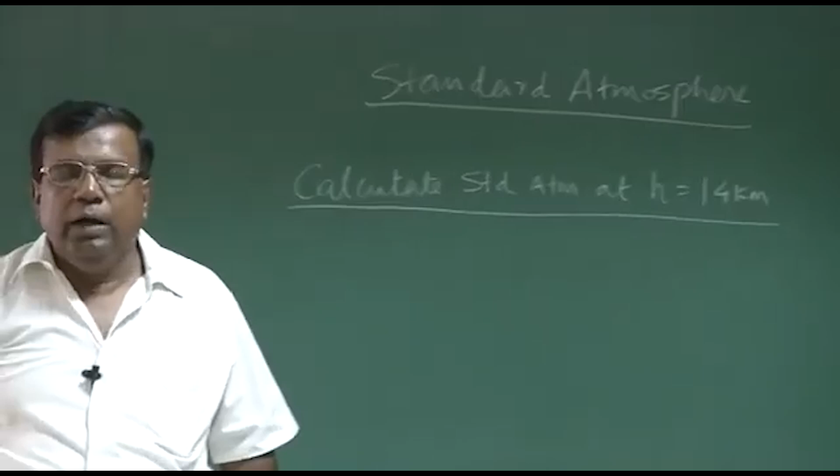I'll be solving one practical problem. Let us say I want to calculate standard atmosphere at h equal to 14 kilometers. This is my question. And what do I mean by standard atmosphere? I am asking, do I know pressure, density and temperature?

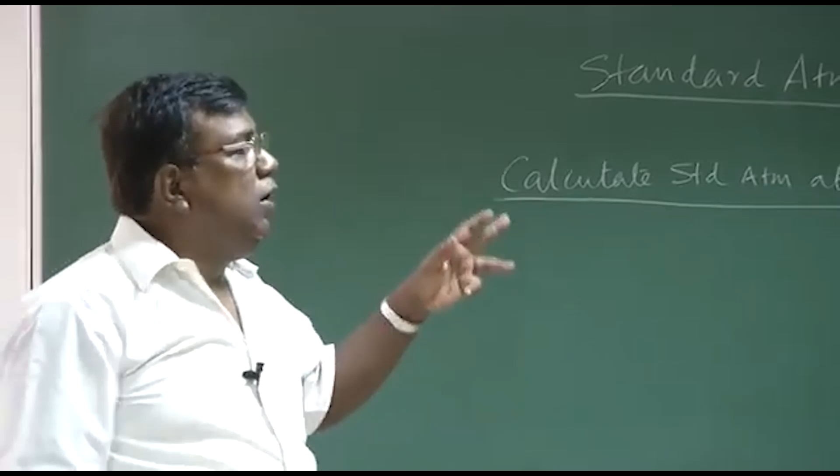At the same time, I know that temperature data versus altitude has been generated experimentally by firing sounding rockets and launching weather balloons at different places, and some average values have been taken. These average values were used to represent the variation of temperature with altitude, which we have already seen. Please understand, this is experimentally generated. This is the starting point.

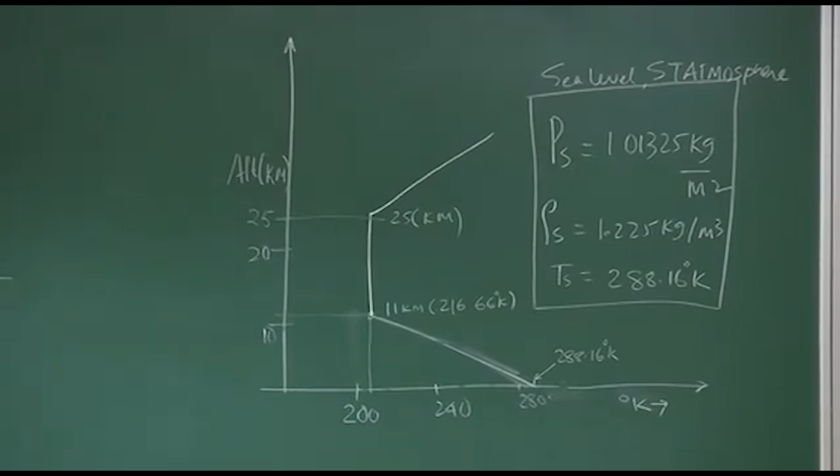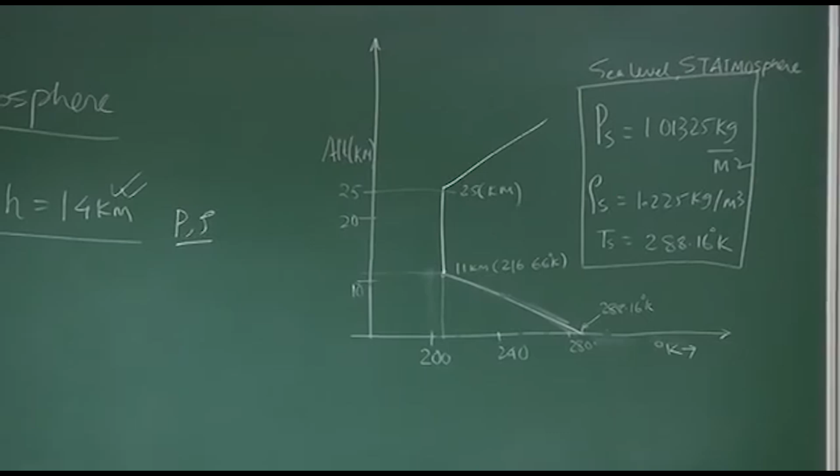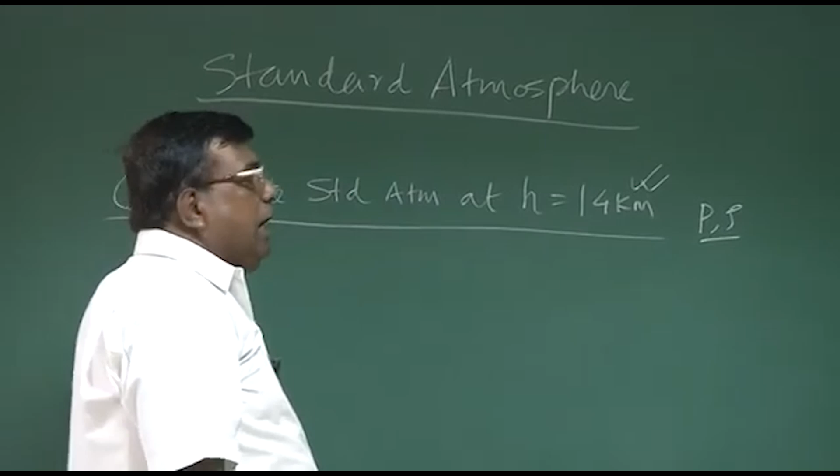Now what is our question? At h equal to 14 kilometer, what are our pressure and density? Temperature we already know from this variation, which is agreed by every team and organization working in aerospace. So when I evaluate at h equal to 14 kilometer, I should immediately see the temperature variation. That is the starting point.

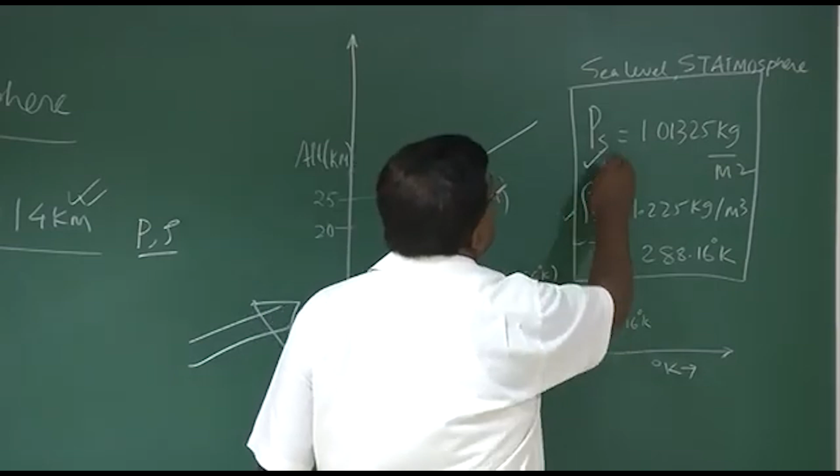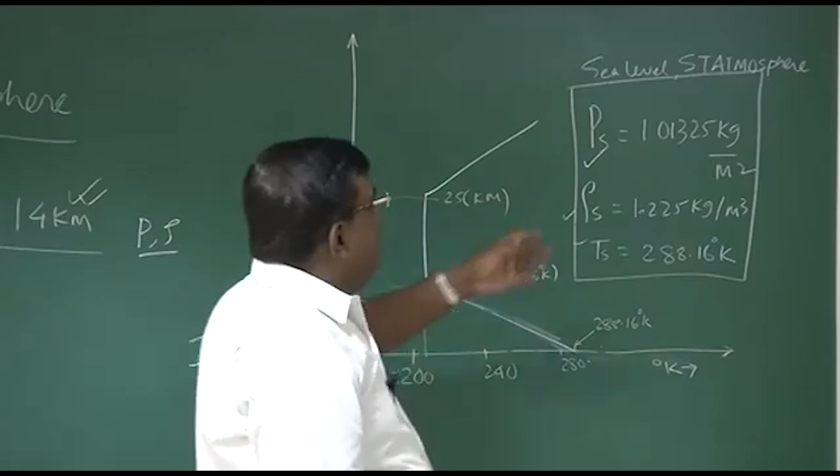At sea level, in standard atmosphere condition, these are the values: pressure is 1.01325 kg per meter square, density is 1.225 kg per meter cube, and temperature is 288.16 degree K. And of course, this standard pressure we mean static pressure. Whenever we say pressure without mentioning anything associated with it, we are actually meaning static pressure.

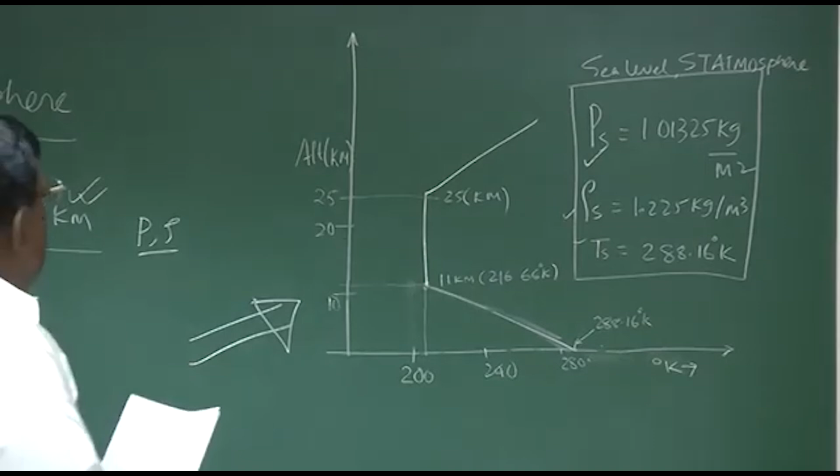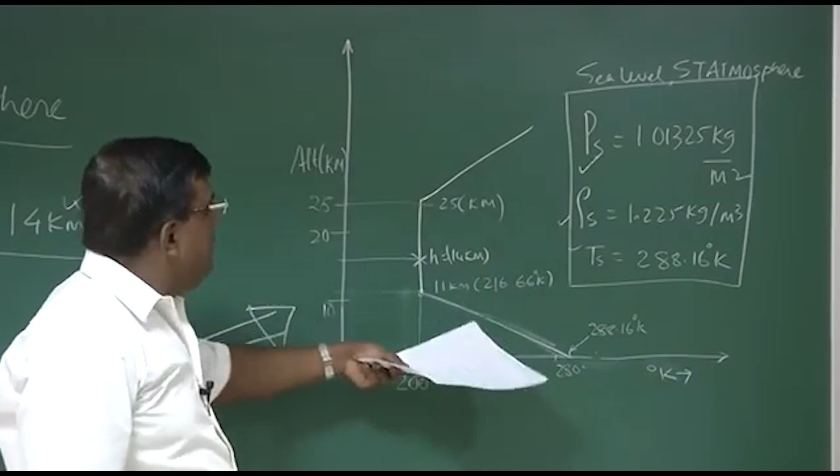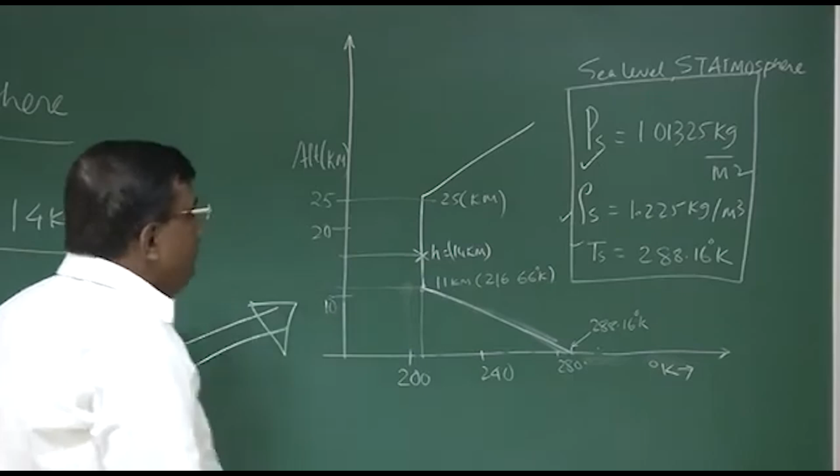So if I want to find the properties at 14 kilometer, let's say this is the point where h equals 14 kilometer. It's very simple. From here I have to start and find what the property is here. I know from here to here there is something called gradient region, and then there is an isotherm. So there are two regions, and we know how to calculate the properties using P equal to rho RT, assuming air to be a perfect gas.

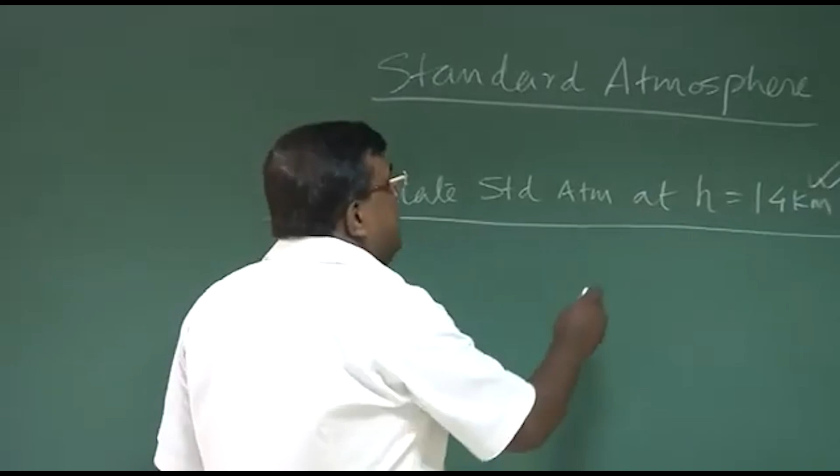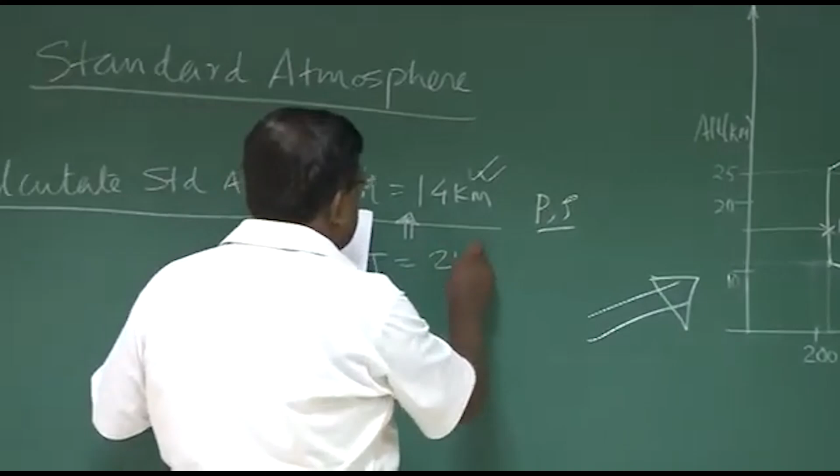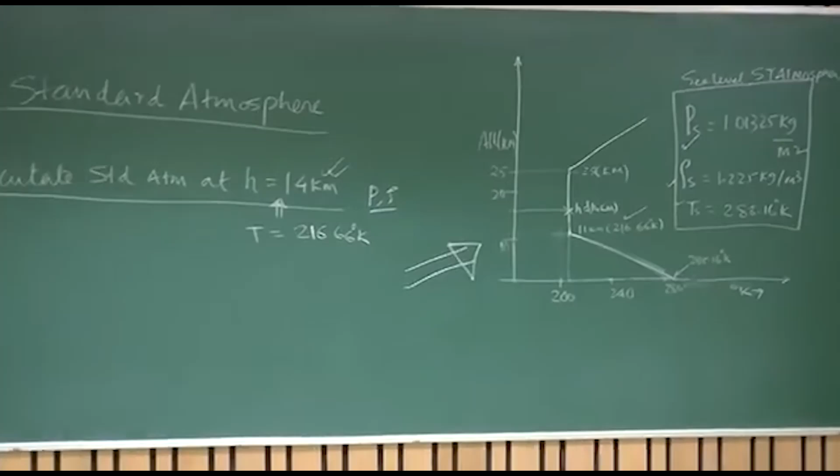Since it is h equal to 14 kilometer, I immediately see here and find that at 14 kilometer the temperature is 216.66 degree Kelvin, which I have written here. This I am directly getting from this chart. In practice, you will find there is a standard atmosphere table generated. You can do a Google search and find it, and I am trying to show you how that table was generated. As a specific case, I have taken h equal to 14 kilometer. What are the values of pressure, density, and temperature, we will find out.

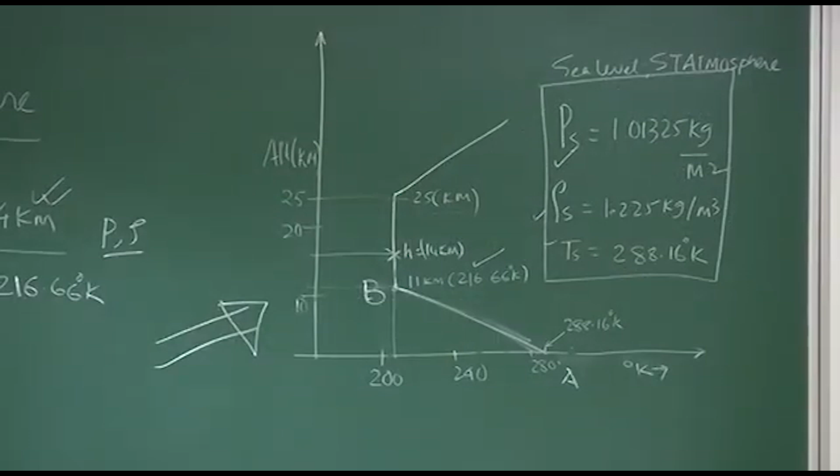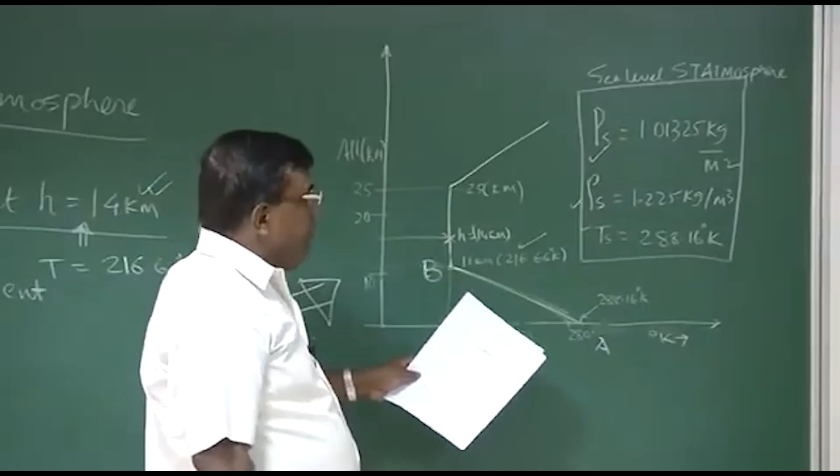So first, what I do is mark it point B, and let me call this point A. I will first see up to 11 kilometers, this point A to B, because there is a gradient part, since the temperature has a lapse rate. And then from 11 to 14 kilometers, it is isotherm, that is, temperature is constant.

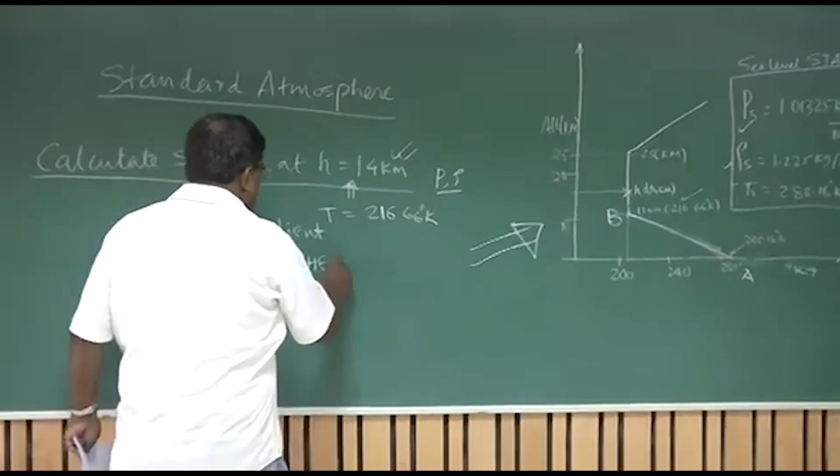We have already developed relationships for the gradient region as well as for the isotherm. We have to simply apply that. Let us do that. If you see in the gradient region,

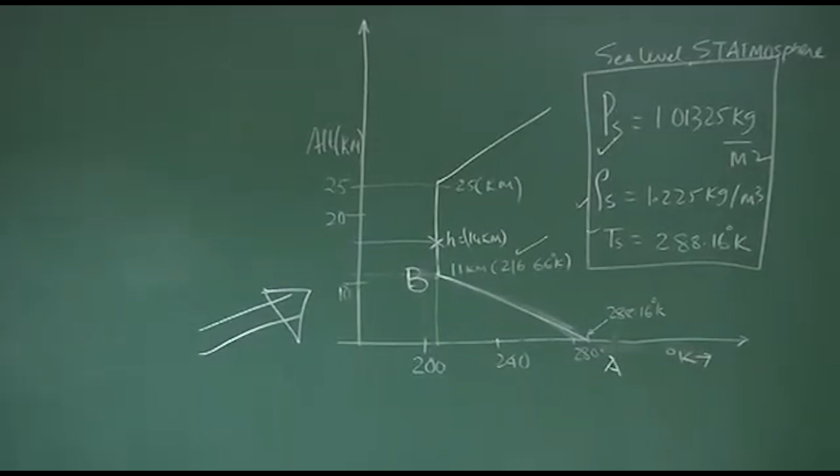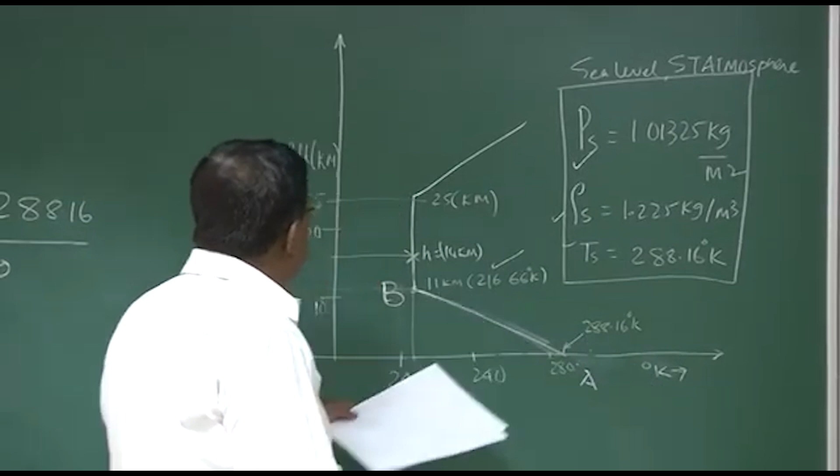the lapse rate, which is dt by dh, is how much? This point is 216.66, so this will be 216.66 minus 288.16 by 11.0 minus 0. This is the standard condition, 288.16, minus this, and height is 0 and 11 kilometer. So this I get as minus 0.0065 Kelvin per meter, which is, you know, the lapse rate.

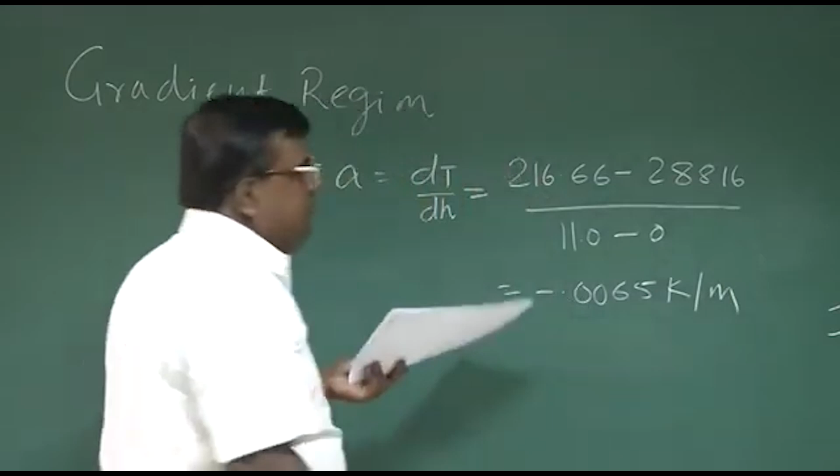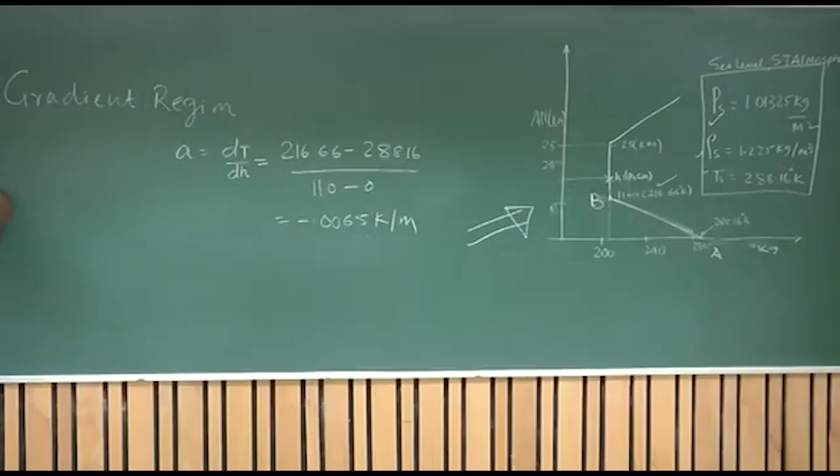It's nothing we are calculating, because it is the way we have plotted this altitude and temperature variation through experimental data. Now, in the gradient region, what are the relations?

If we check the notes, it is P by P1 is equal to T by T1 to the power minus G0 by AR, where R is the gas constant, and rho by rho1 is T by T1 to the power minus G0 by AR plus 1.

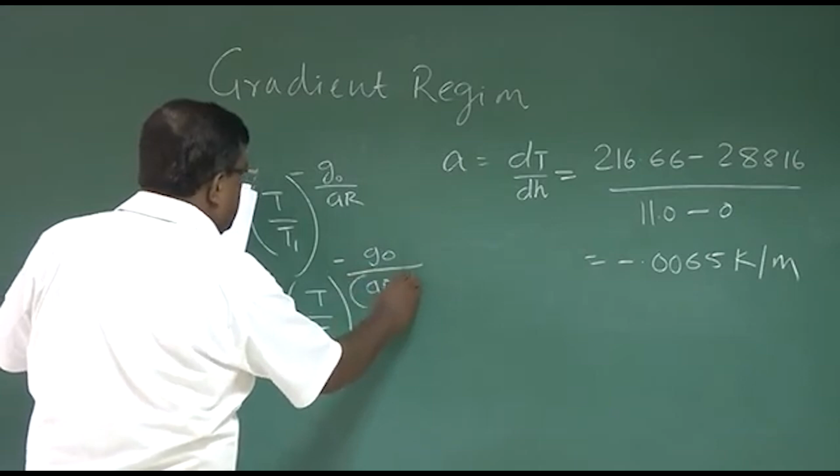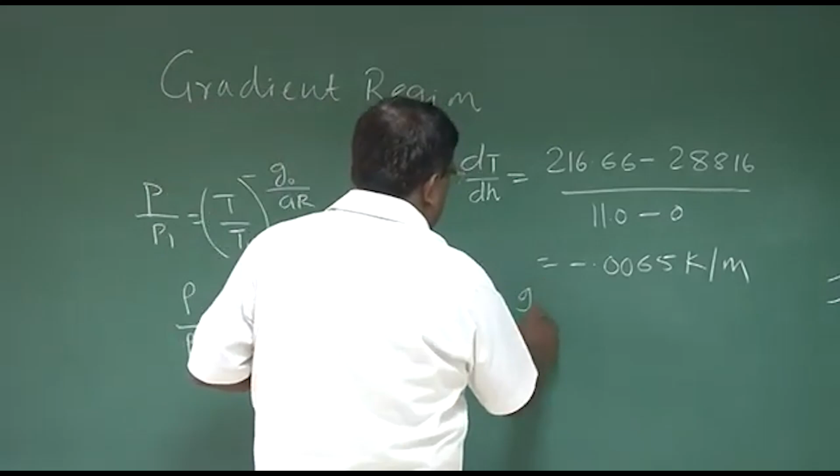What was G0? G0 is the sea level value of G, right? The G0 concept is used for geopotential height. So that is 9.8 meter per second square. Now, what should I plug?

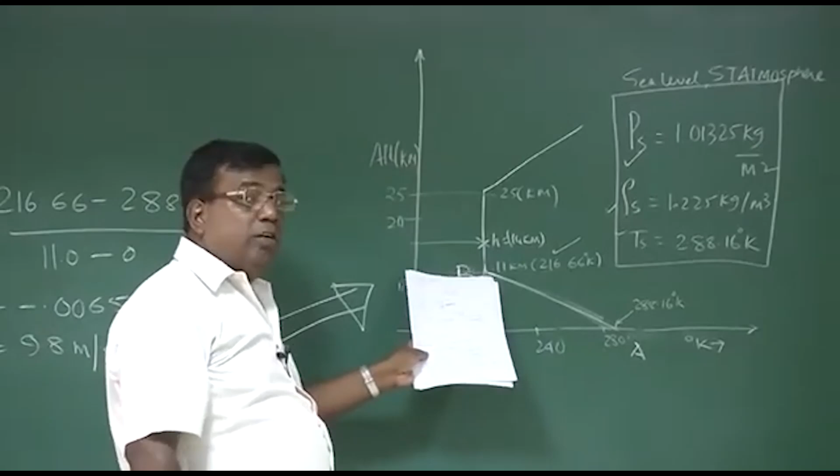I want to find pressure at 14 kilometer, but we are now first finding pressure up to point B, 11 kilometer, because up to B it follows the gradient law. That is, up to B, these relationships are available and valid. So first I find P11 by Ps.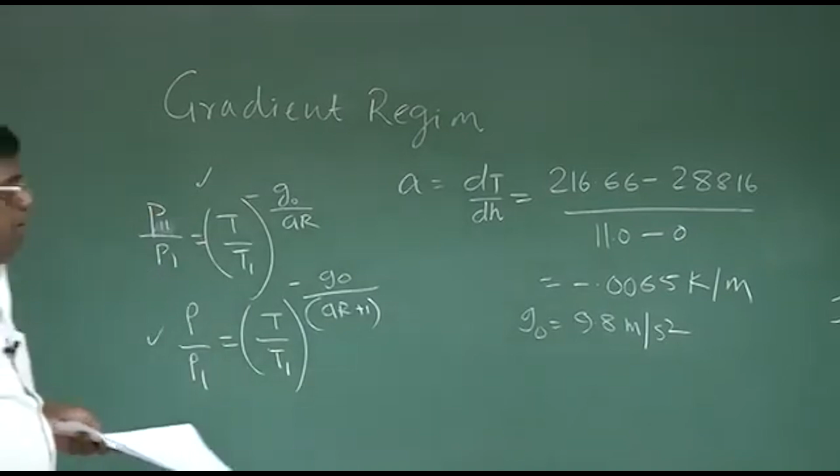What is P1? P1 is the standard atmosphere value, which I know. T and T1 - T1 is the standard atmosphere, and T is T at 11 kilometer, which also I know as 216.66.

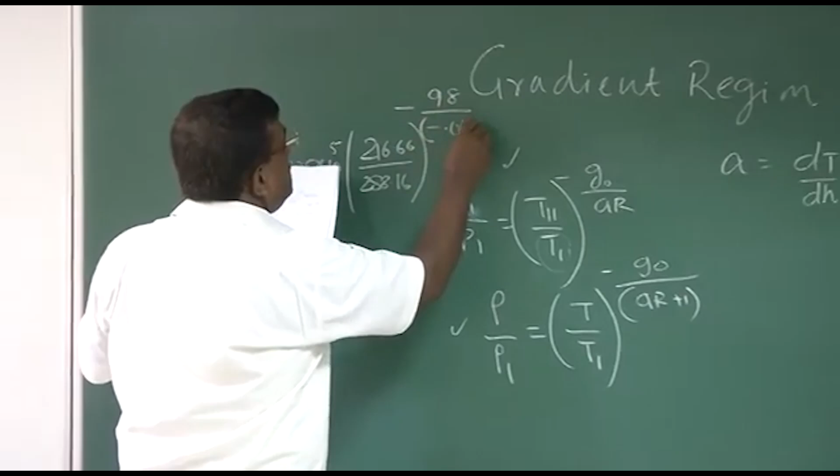So if I substitute this, what do I get? P at 11 kilometer is 1.01325 into 10 to the power 5 - that is the P at sea level - into T, which is 216.66 divided by 288.16, to the power minus G0 by AR, where G0 is 9.8, and A is minus 0.0065, and R is 287 in SI units. This will give me P at 11 kilometer equal to 2.26 into 10 to the power 4 Newton per meter square. Is it clear? I have just substituted the values.

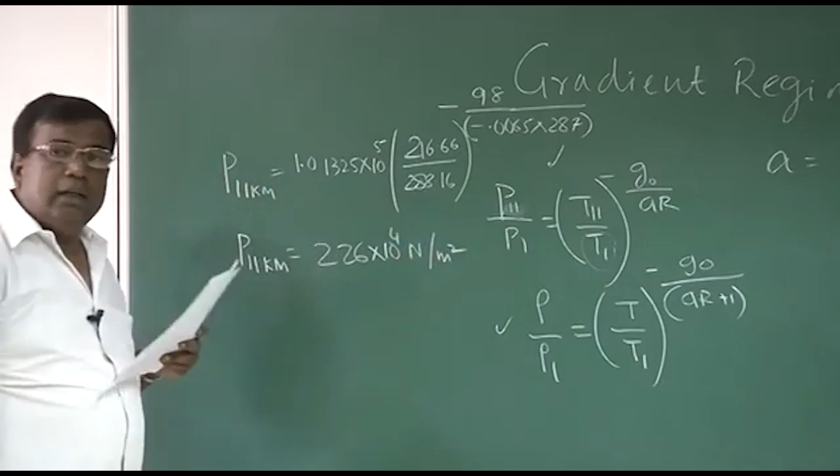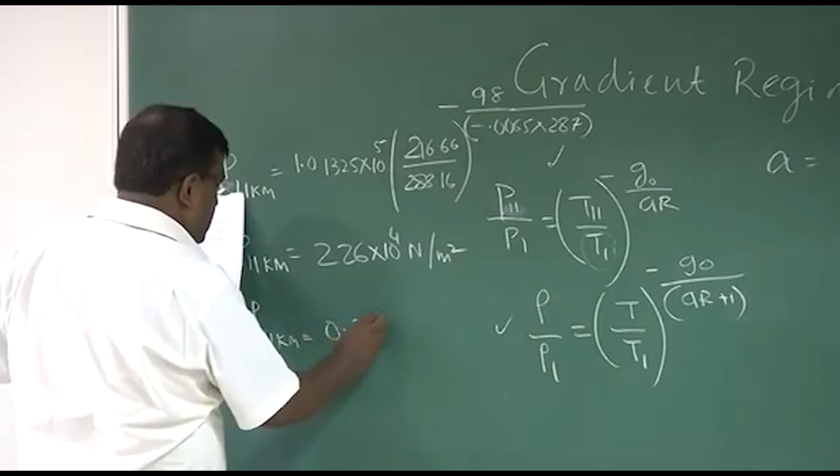Similarly, if I substitute for rho, I get rho at 11 kilometer is equal to 0.367 kg per meter cube. Try to develop a feel for this number.

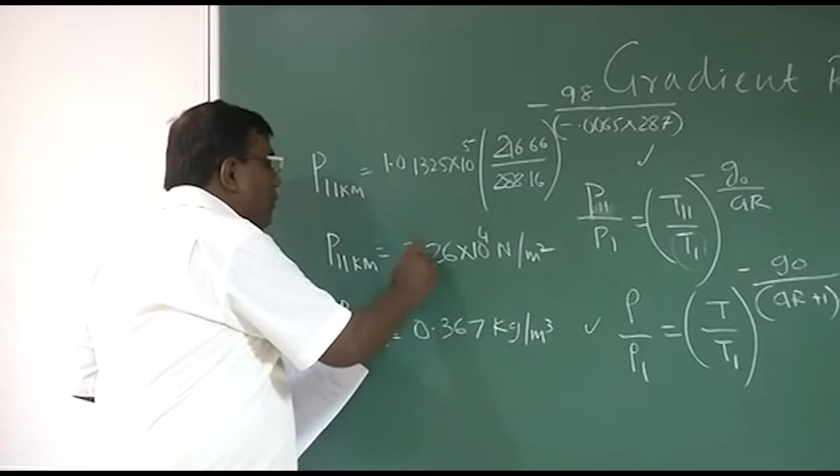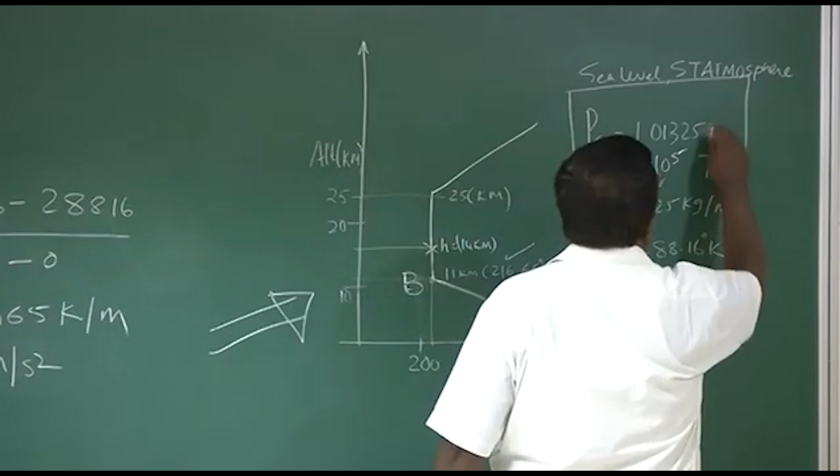If we are flying at 11 kilometer, the pressure is 2.26 into 10 to the power 4. And what is the atmospheric pressure at sea level? It is 1.01325 into 10 to the power 5 Newton per meter square. So pressure has reduced so much.

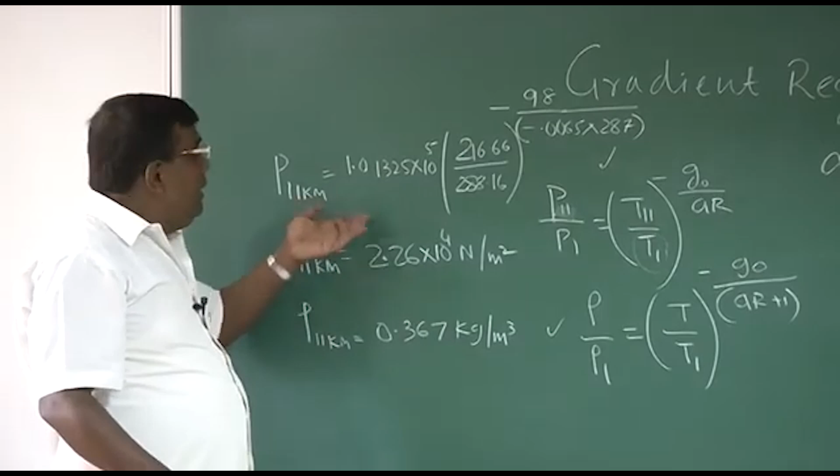So what will happen? Suppose the cabin is pressurized with atmospheric pressure or a little less, generally calibrated with 6,000 feet, 5,000 feet, 8,000 feet. Let's assume it is just atmospheric pressure. Then the difference is so much that if there is a crack on the windshield, things inside will be thrown out. And also, if we do not take proper care with the understanding that there is so much difference in pressure, our structural design also will not be appropriate. So we have to be very careful when designing an airplane.

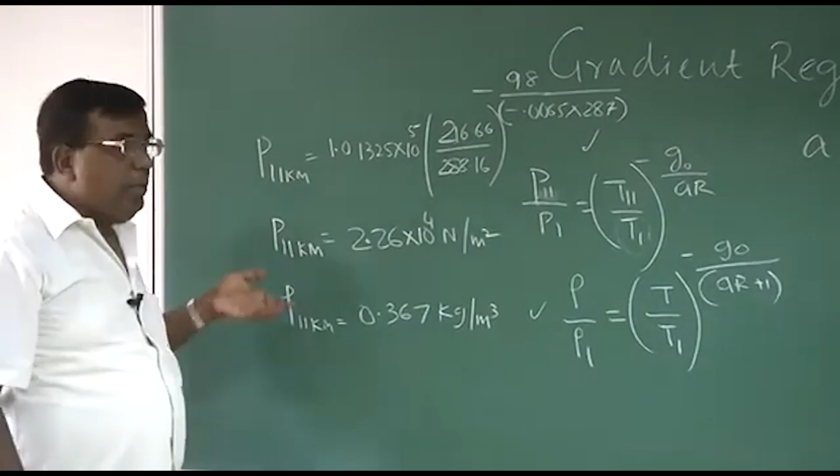We must see at that altitude what is the pressure difference. Most airplanes, jet engines and all, you'll find will be flying at 11 kilometer, which is the tropopause. So 11 kilometer values we now know.

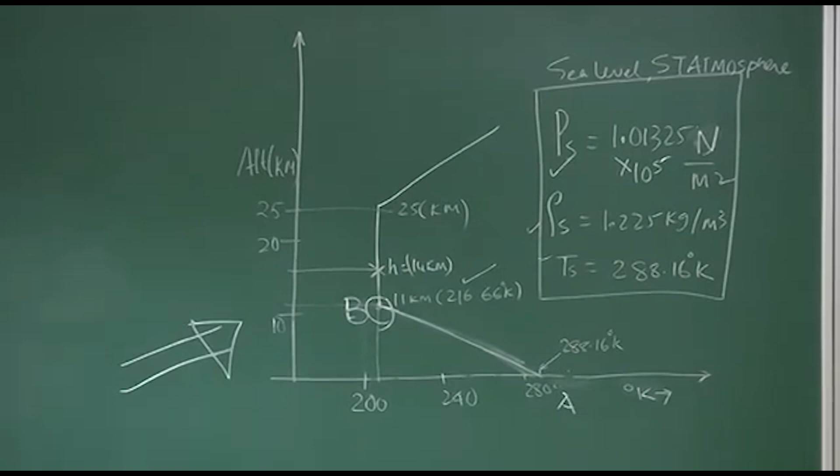We have to go to 14 kilometer. So what is the way? Now you know that you have to apply the relationship used for tropopause. So let us go back and check what was the relationship for tropopause. So our problem now, this is point B.

Now I know P is 2.26 into 10 to the power 4 Newton per meter square, and rho is 0.367 kg per meter cube. I have to find values at 14 kilometer, and this is 11 kilometer. So we'll check what was the relationship for tropopause.

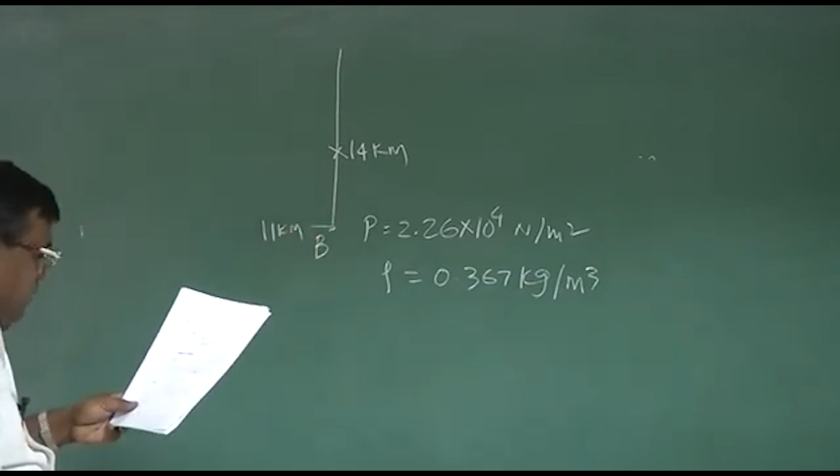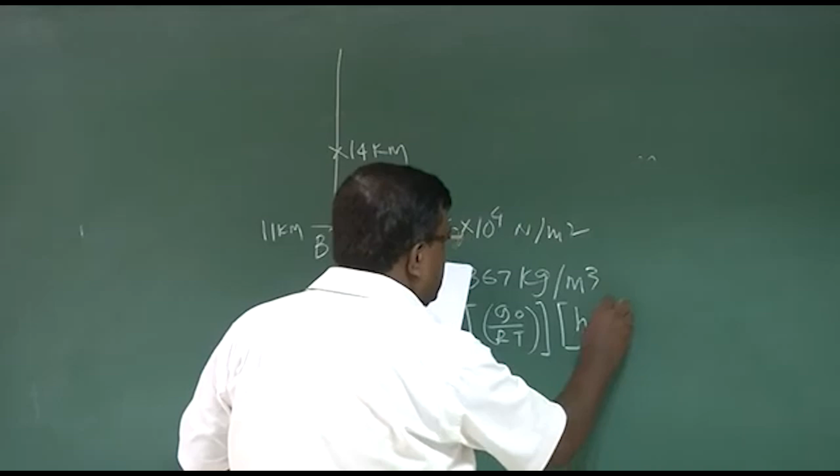If you check your notes, you will find P was given as P1 times e to the power minus G0 by RT into H minus H1. Similarly, rho was given as rho1 times e to the power, same expression, G0 by RT into H minus H1.

What is P1 here now? I am going from 11 to 14, so basically I want to find at 14 given P1, which is at P 11 kilometer. Again I want to find rho at 14 given rho at 11 kilometer. These two values we have already calculated. I will have to just substitute that, and for H minus H1, what should I put?

H minus H1 means from here to here, H is 14 kilometer. What is H1? H1 is 11 kilometer. So this difference is 3 kilometer, and to be consistent, this unit is 3000 meter. Okay, now simply substitute here.

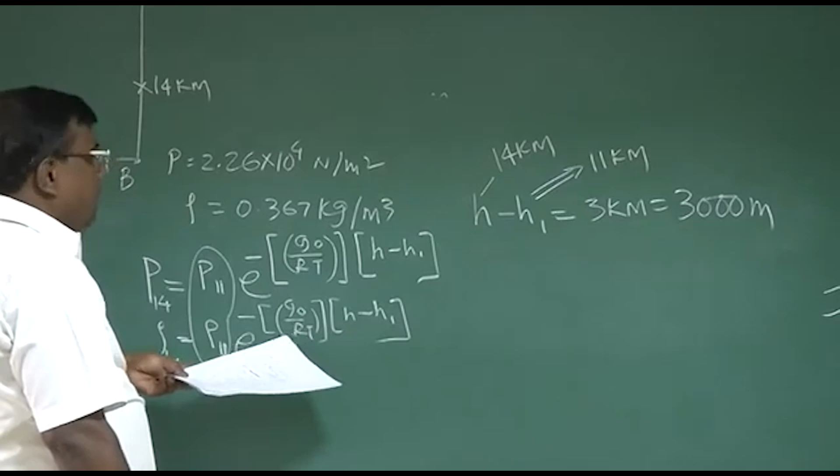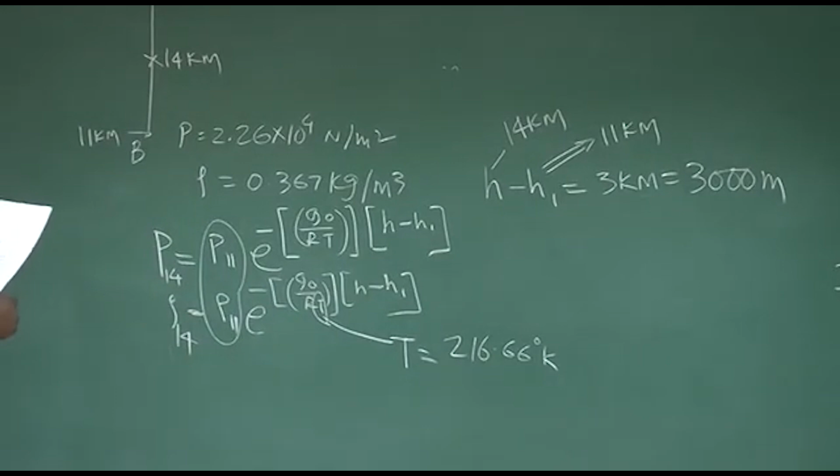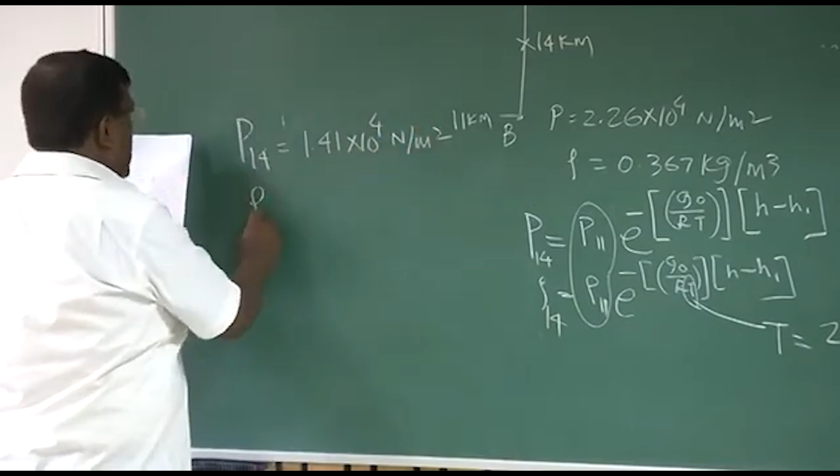What about temperature? You know it is tropopause, so whatever temperature was here, same will remain here. So this is 216.66 degree Kelvin, and if I substitute this, then I get the value. I get P at 14 kilometer, please do it yourself. It's very explicit now, 1.41 into 10 to the power 4 Newton per meter square, and rho at 14 kilometer is 0.229 kg per meter cube.

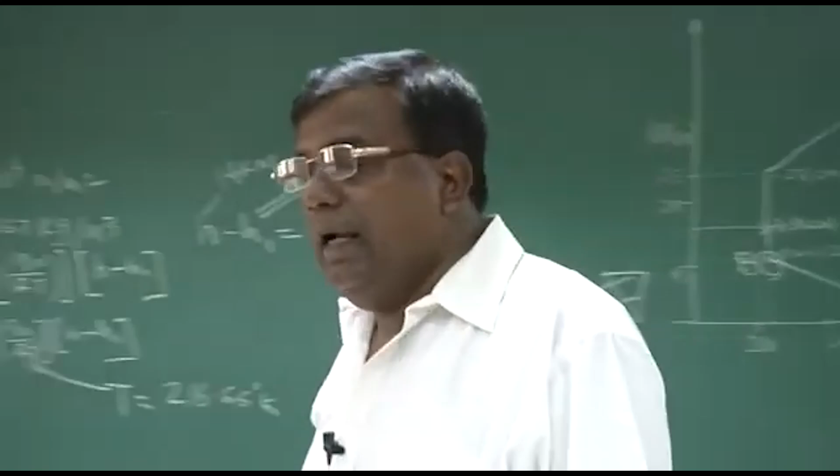Please do the calculation yourself, I may commit some error. Although this example I have taken from a book, Introduction to Flight by Anderson. There are plenty of books you can use, you can refer. But mostly you'll find examples I am picking from Anderson. Then there's a book of Stability and Control by Nelson. Do a Google search, you'll find so many books, right?

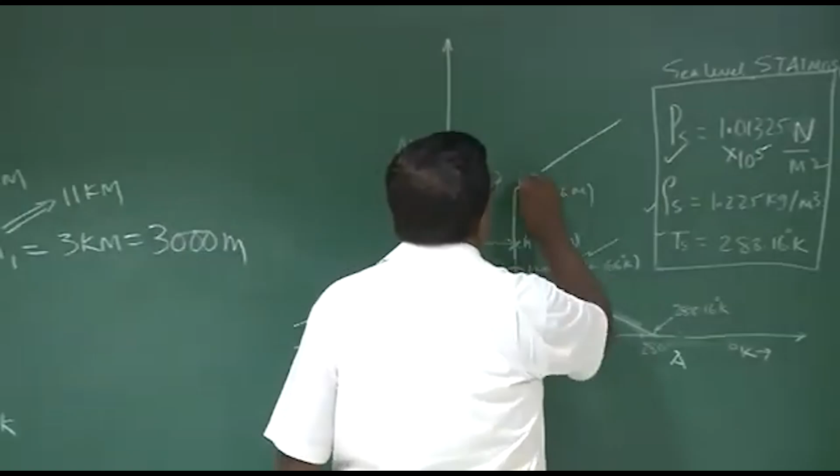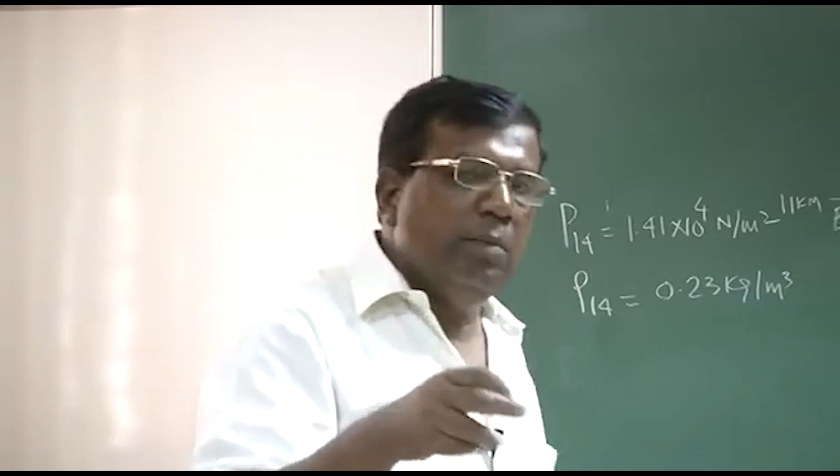So what is the message? That once this temperature profile is given, which is measured and agreed based on experimental result, you ask me any altitude, I can find out the pressure, density and temperature. Temperature anyway is known, right? That is how the whole atmospheric table is created. The table will give H, what is the pressure, what is the density, what is the temperature. So you can look through the table and find out. Okay, so this is the basis of generation of the standard atmosphere table.

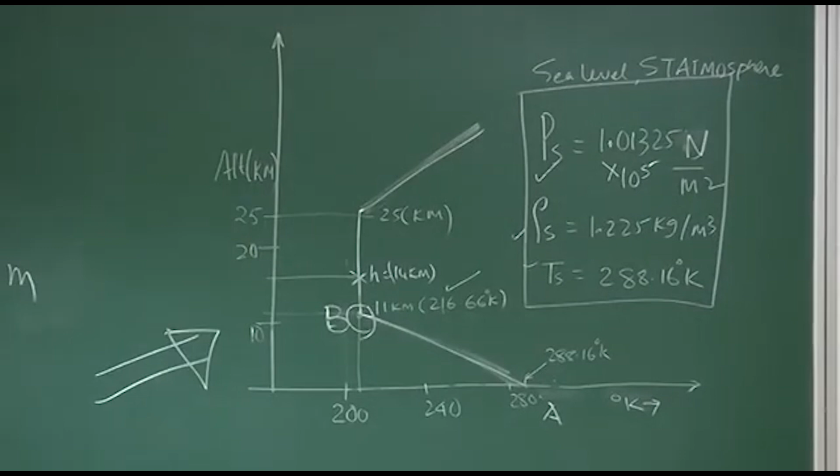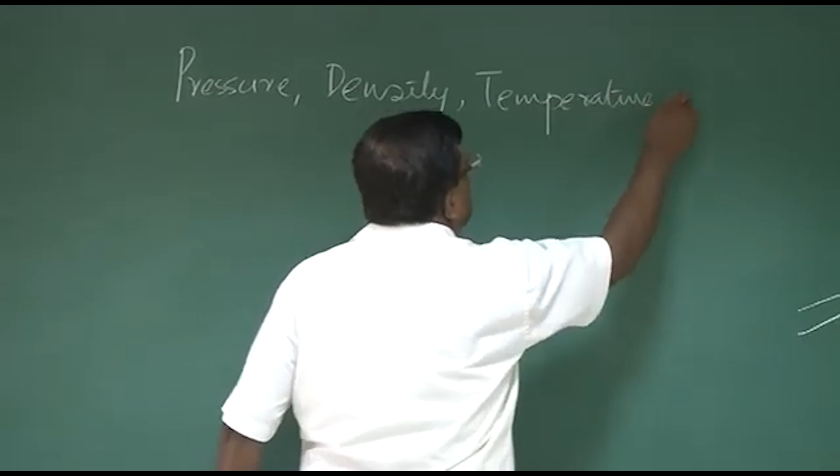This is clear? Okay, now second part, which also I want to solve a problem, so that you are clear about in your mind what you are doing. We talked about pressure, density, and temperature, altitudes. Right? Let us quickly recap.

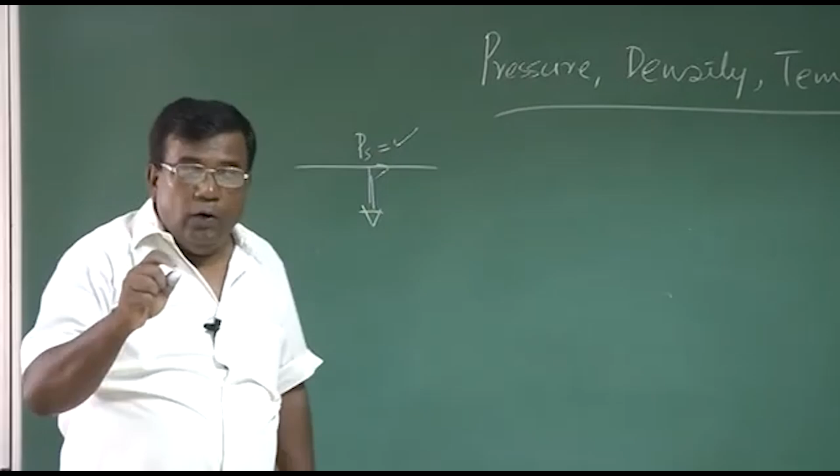What is the pressure altitude? Suppose an airplane is flying at 11 kilometers and it is sensing some static pressure. The pressure altitude is defined like that: whatever static pressure it is sensing in reality, you now come back and see the standard atmosphere table and see what is that altitude in standard atmosphere which will record this much of static pressure. That is, if I am flying at an altitude, there is some static pressure, I have some value, then I check the standard atmosphere and look for this static pressure, and what is the corresponding altitude in standard atmosphere. So I call that pressure altitude.

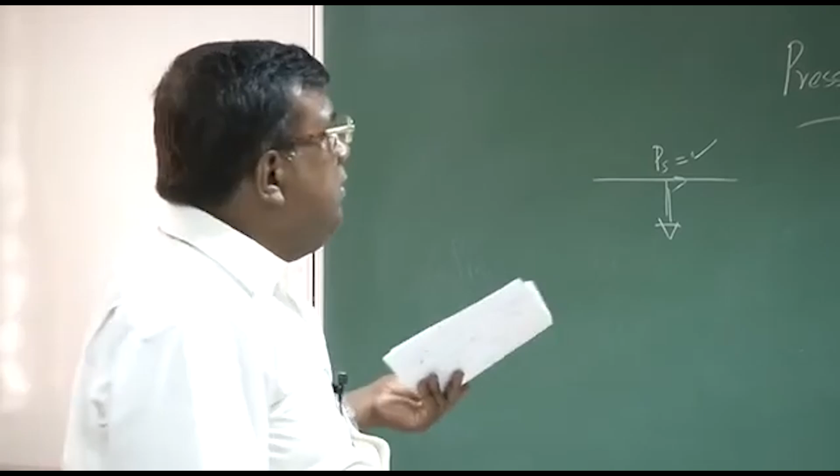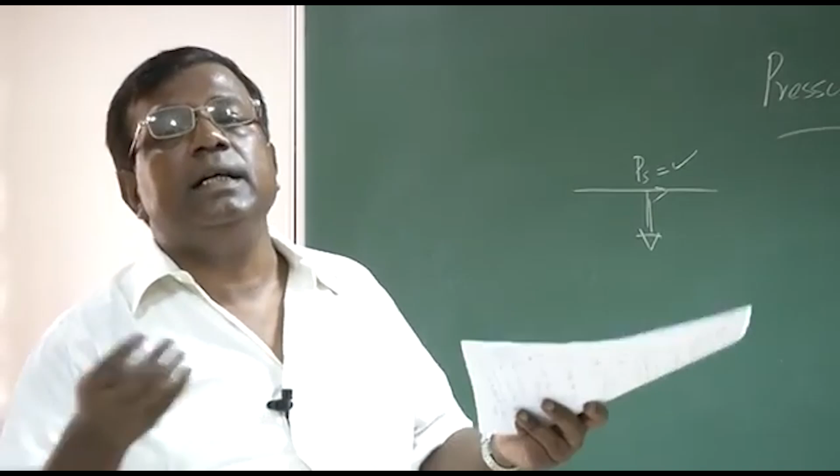Similarly, temperature altitude, and then I know density altitude because P equal to rho RT, I find density altitude. From there I again find out what is that density, then I check in the standard atmosphere, what is that altitude that gives that much of density in standard atmosphere. As simple as that. It will be clearer once I solve a problem.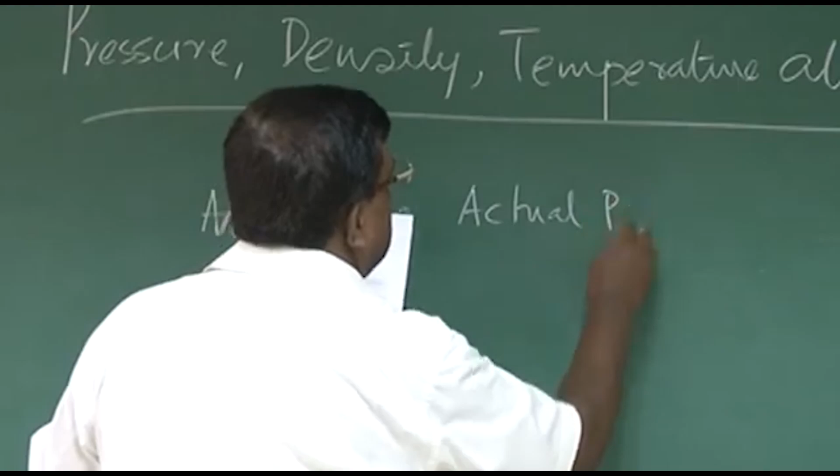Let's say, suppose an aircraft is flying where actual pressure and temperature are 4.72 into 10 to the power 4 Newton per meter square and temperature 255 degree Kelvin respectively. Question is, what is the pressure altitude, what is the temperature altitude, and what is the density altitude?

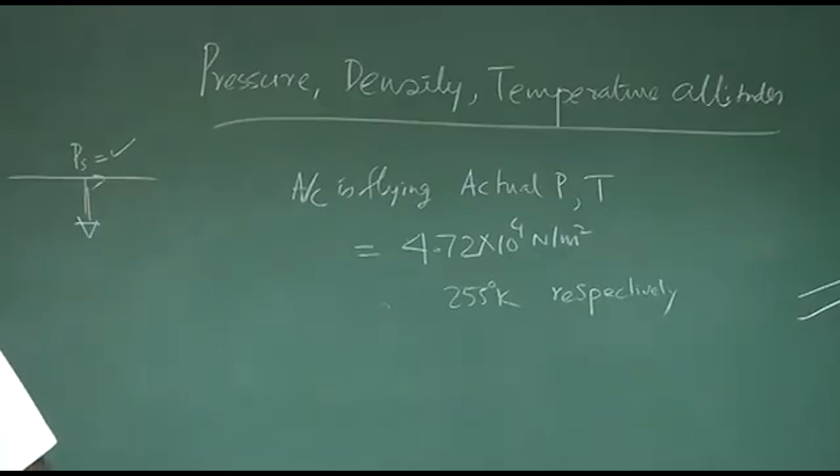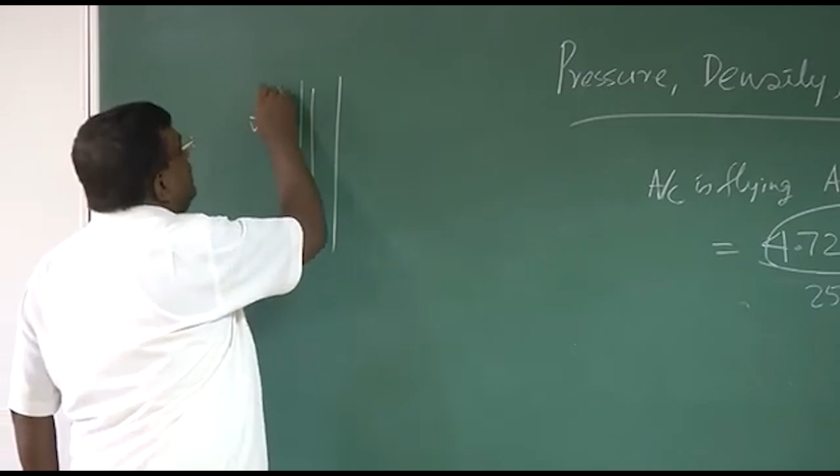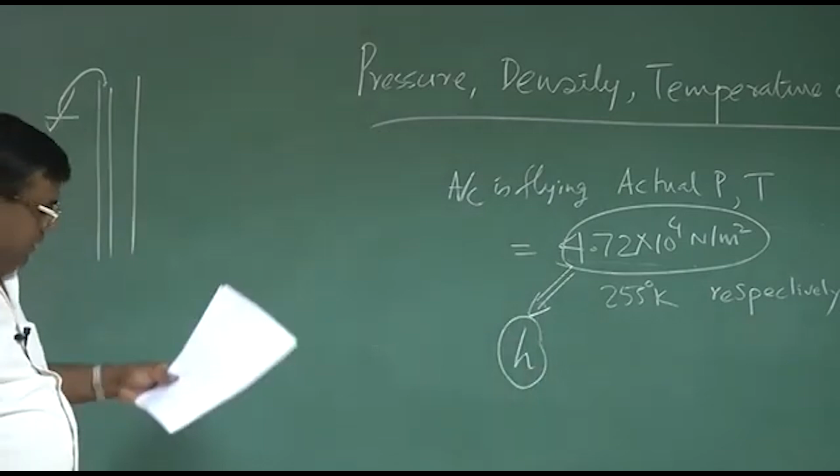What I will do now, I will take this number, this much of pressure, then I will go to the standard atmosphere table, I will find out where is this pressure and check what is the altitude that corresponds to that pressure. That is, I will see the standard atmosphere table and look for this pressure and corresponding value of H, that will be the pressure altitude. In this case, you will find that the pressure altitude will be 6 kilometers.

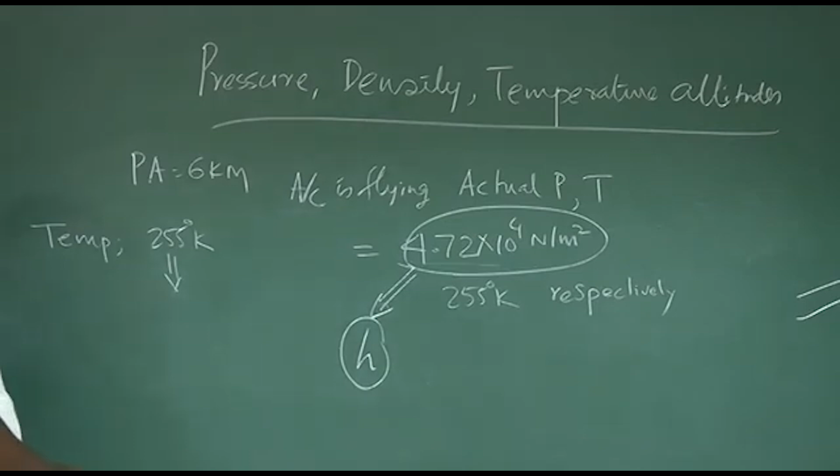Then for temperature altitude, again same thing, so mechanical. What is the temperature recorded? 255 degree Kelvin. Then from there, go to the standard table and see what is the corresponding altitude in standard atmosphere as far as H is concerned. So that H you will find is around 5 kilometers.

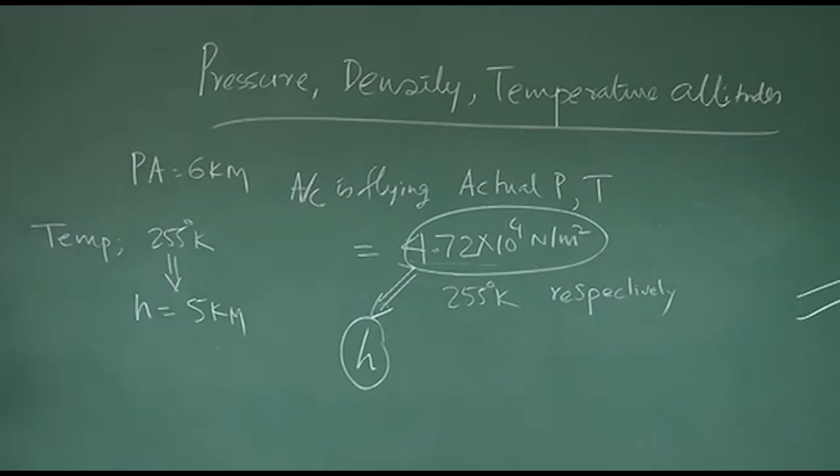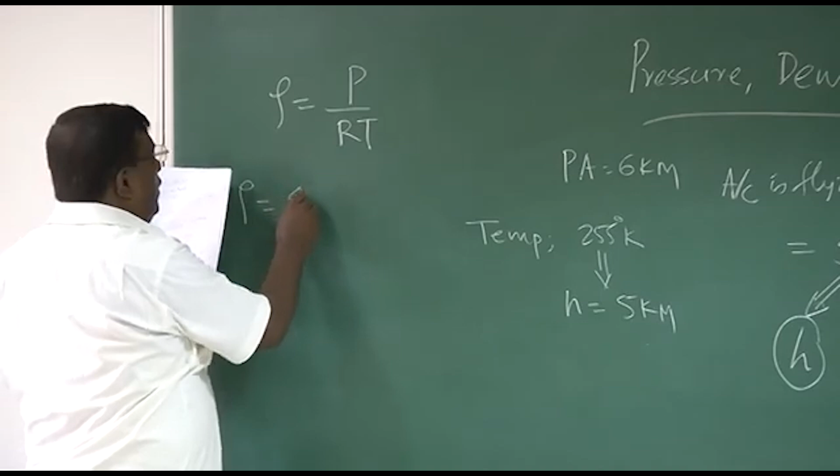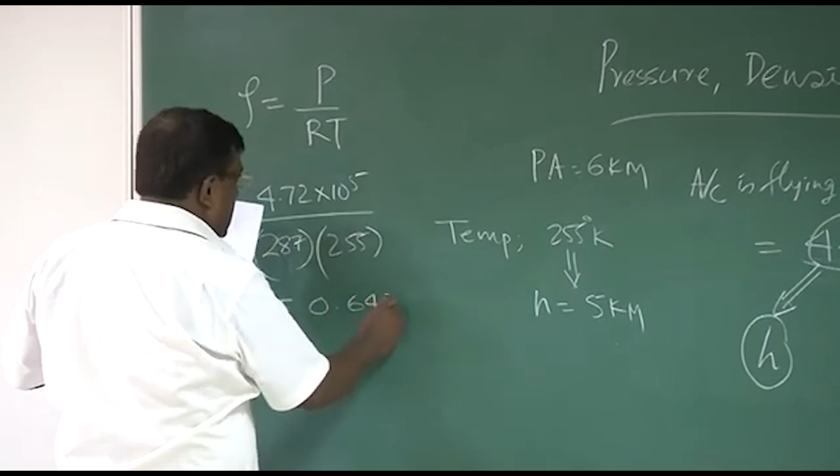Okay, so now to find the density altitude, what we'll do is simply first find out the density. How do you find density? I write rho equal to P by RT from the perfect gas law. So I'll find rho equal to 4.72 into 10 to the power 4, which was the pressure recorded, divided by R, we know 287, and T we have recorded as 255. So I get a density value of 0.643 kg per meter cube.

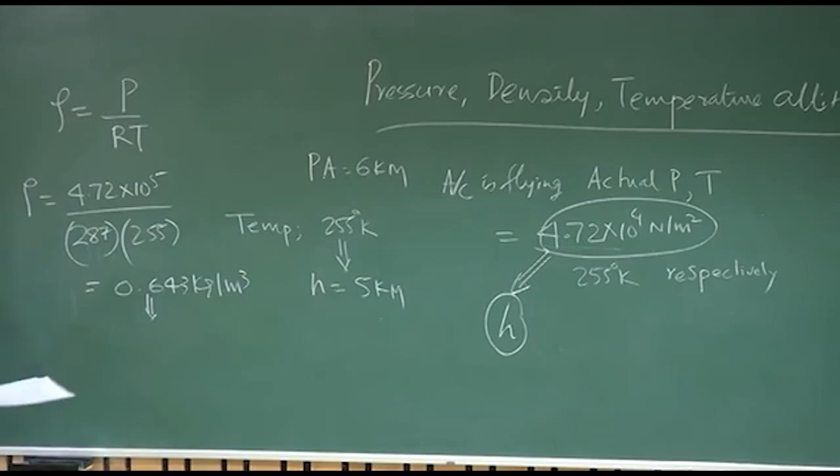Now it's very simple. I go to the standard atmosphere table and see this density corresponds to what value of H, and that H will be, in this case, 6.24 kilometer. So this becomes my density altitude.

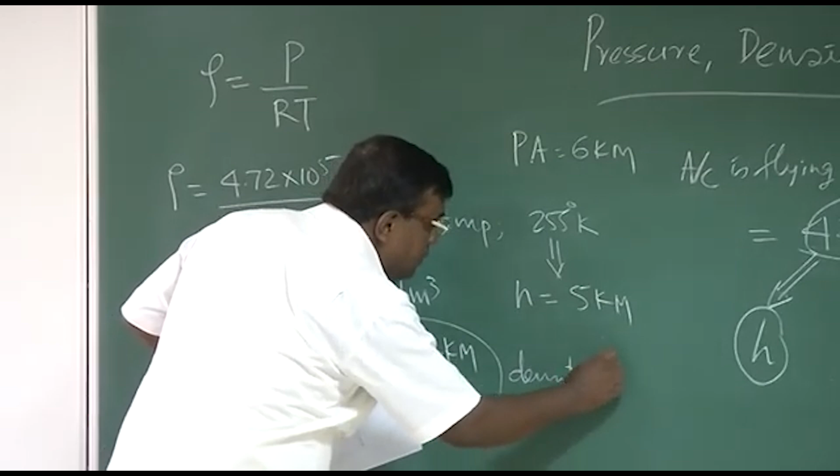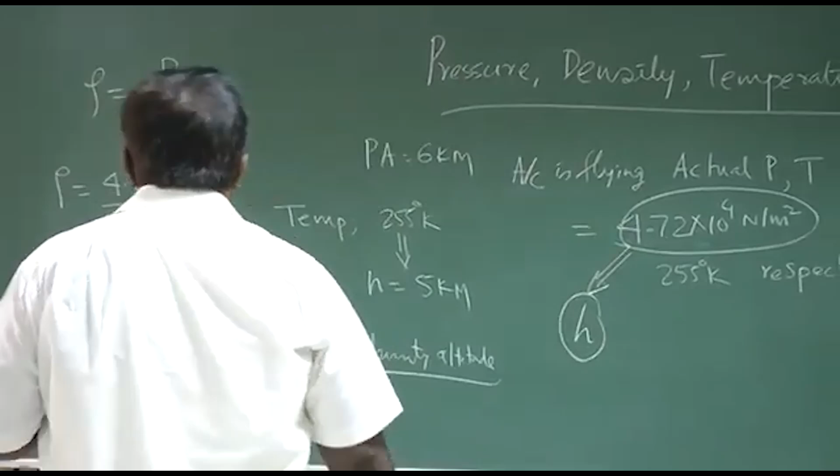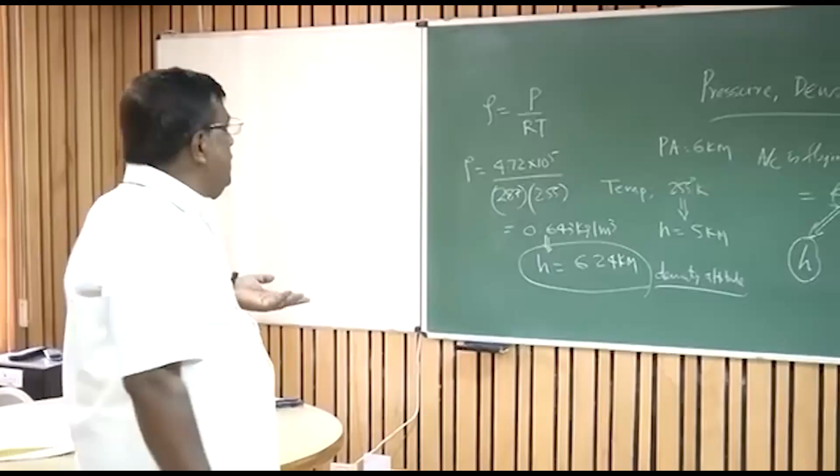Correct? So you could see, although the aircraft is flying at a fixed geometric altitude, their pressure altitude, temperature altitude, and density altitude are different. That should be borne in mind. Now it's obvious, you should be able to answer this question: at what altitude are the pressure, density, and temperature altitudes the same? The answer is at sea level. Okay, thank you very much.